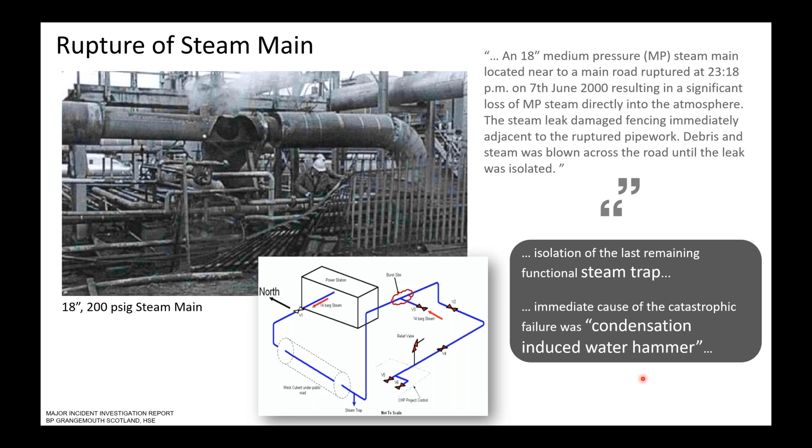So the steam trap, as many of you should already know, is a self-actuating valve that automatically drains condensate from steam piping or steam equipment. They are found at regular intervals along steam mains, or on heat exchangers, steam tracing lines, or steam turbines. They serve a critical function in steam systems by acting as a kind of gate to allow condensate to be removed from the steam space without letting the steam escape.

When there is a functional failure of a steam trap, there are two possible events. It can leak and start passing steam internally, creating energy loss and other problems downstream, or it can fail to fully discharge condensate, causing condensate to back up upstream of the steam trap, which is what happened for the steam trap that was isolated in the previous slide.

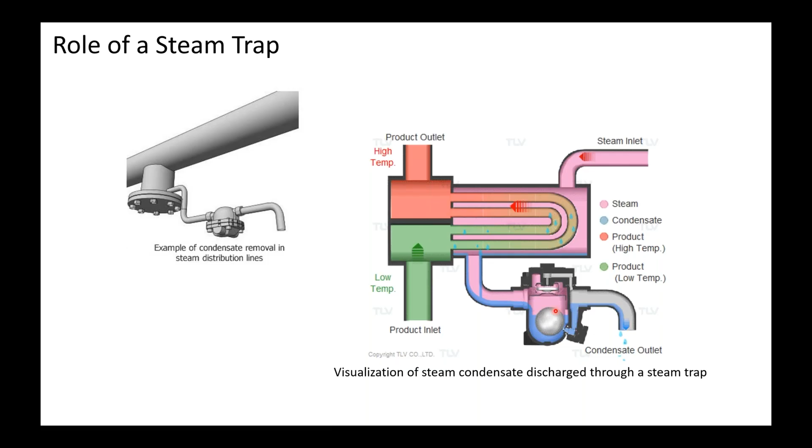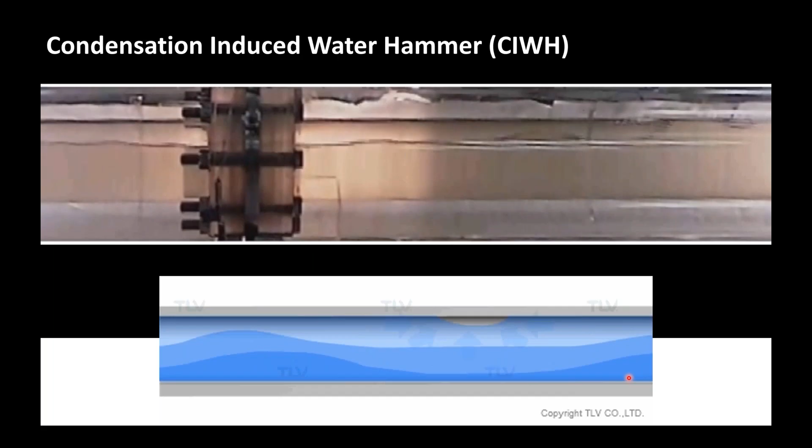So when water hammer happens, we can actually look at the mechanism of what happens inside the piping. This is a video that was taken by TLV when we generated water hammer. You can see that when condensate starts to back up into the steam space, the flow of steam can create waves, and that wave creates an enclosed steam space. When the steam space collapses, the impact causes a massive pressure spike. That's what we actually hear as water hammer.

This is another experiment that TLV conducted back in 2019. Here we used a 4-inch schedule 40 steel pipe, and we wanted to measure the pressure spikes generated by water hammer. We installed some pressure transmitters along the piping, and the system pressure was maintained at around 2 bar, 29 psi. We controlled the flow of steam as well as the flow of condensate through this piping, and then basically just sat down and waited for water hammer to start.

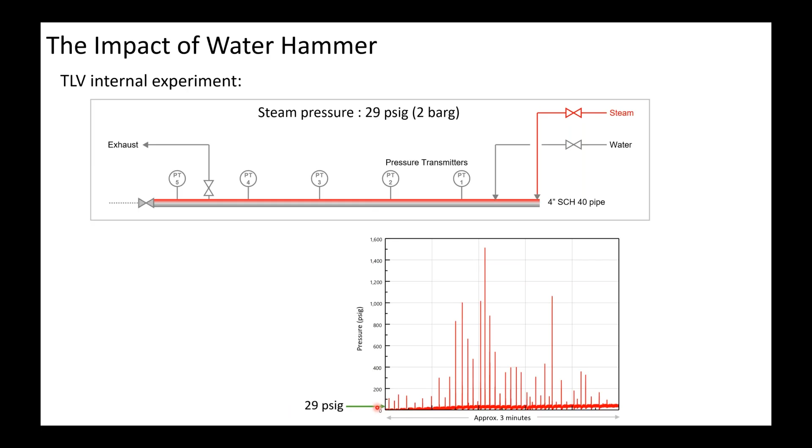This graph shows the pressure trend measured at one of the pressure sensors over a period of about 3 minutes. Like I said, the operating pressure was about 29 psi, and you can see that the peak pressure measured during the water hammer events exceeded 1,500 psi, more than 100 bar gauge. The only reason we didn't measure anything higher was because the pressure transmitters we were using were only rated for up to 100 bar. So this was more than 50 times higher than the system pressure—that was the pressure created by water hammer.

As you can imagine, after we saw these results, what we did was we stood up and moved our chairs further away from the piping before we continued the experiment.

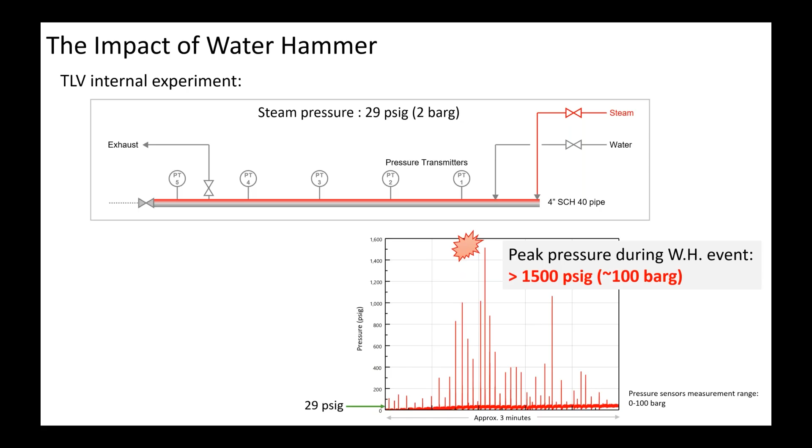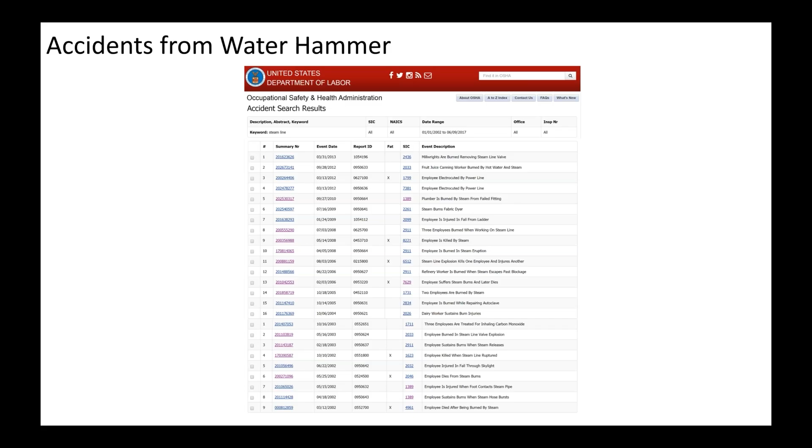Water hammer in steam piping and steam equipment has been known to cause very severe accidents and even fatalities. Looking through the accident records from the US Occupational Safety and Health Administration, we can find events that appear to describe water hammer and events that actually resulted in very serious injuries.

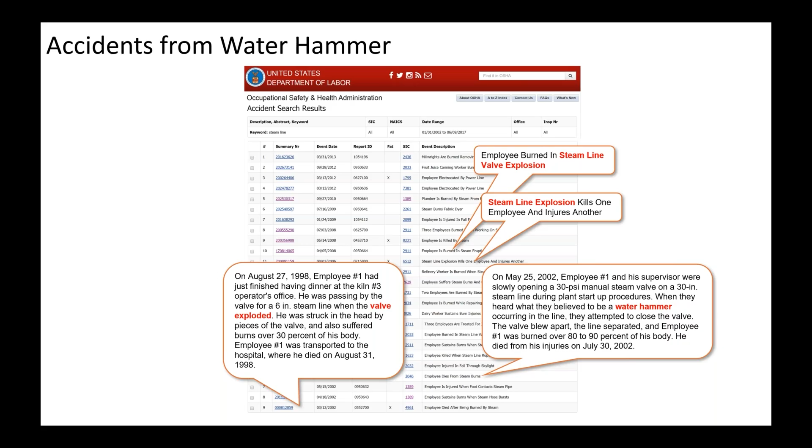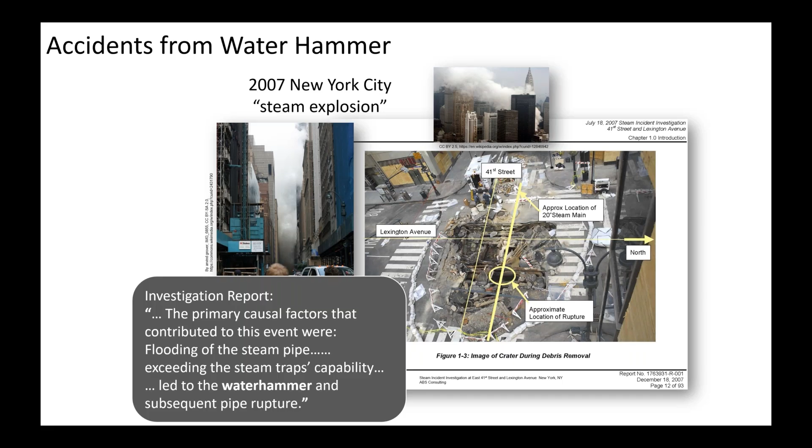Unfortunately, we do not really have the time today to dive any deeper into this topic of water hammer. But I strongly suggest any of you out there who have water hammer issues, you experience problems in your plants with water hammer, yes, reach out to us, reach out to TLV, and I think that's something that we can help you to resolve.

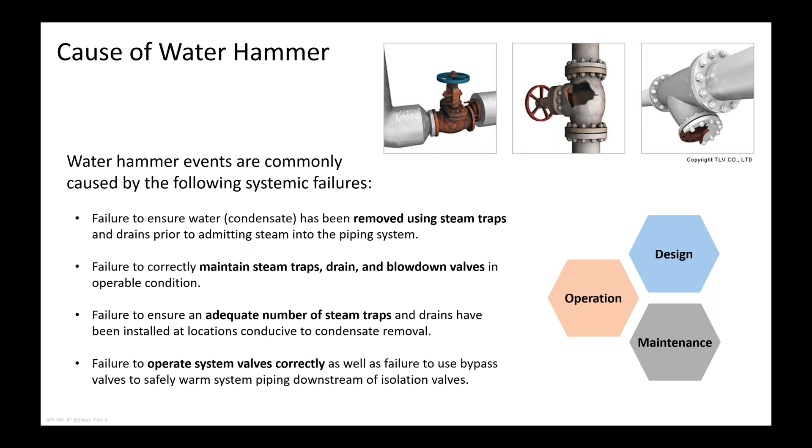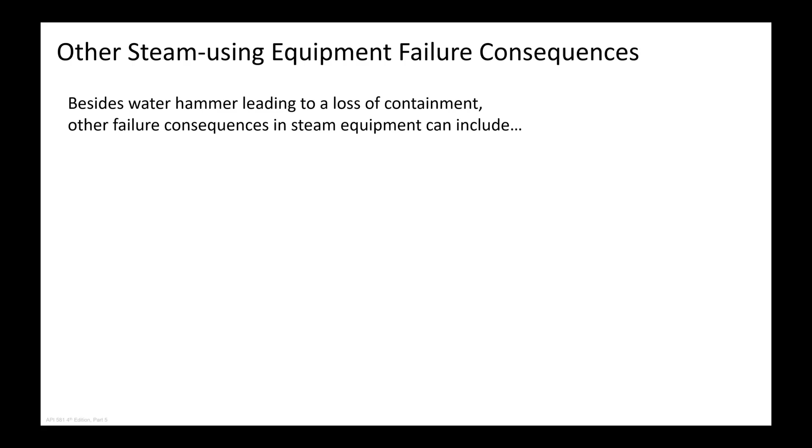I do want to move on to examples of other steam using equipment where we see failure consequences. So besides water hammer, which of course can lead to a loss of containment, we do also see other failure consequences such as steam turbine failures, heat exchanger flooding, and also heating issues.

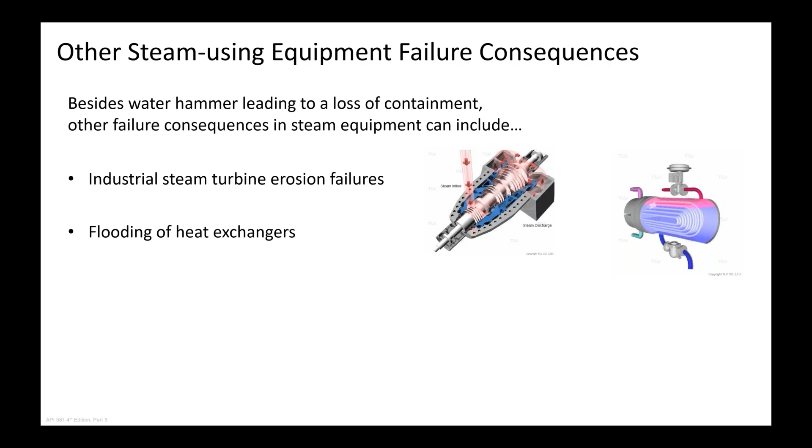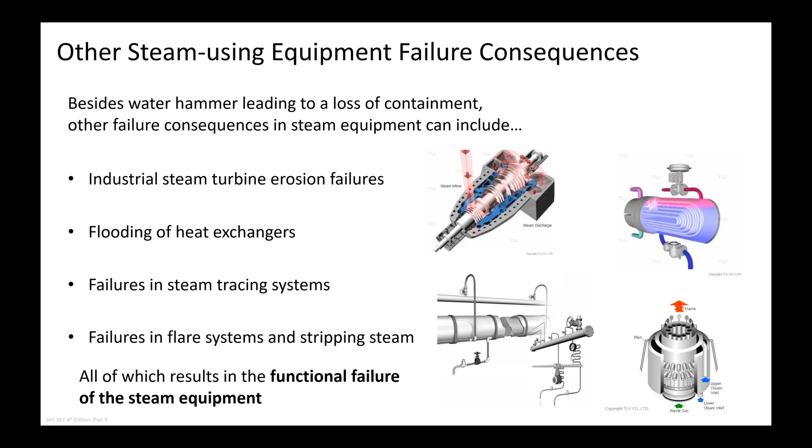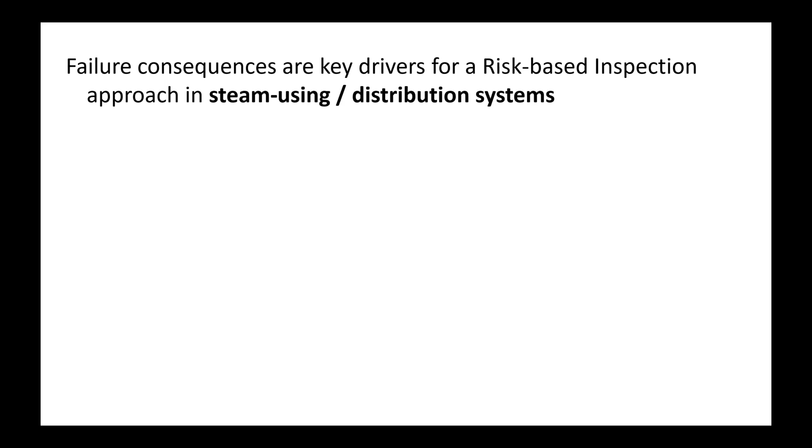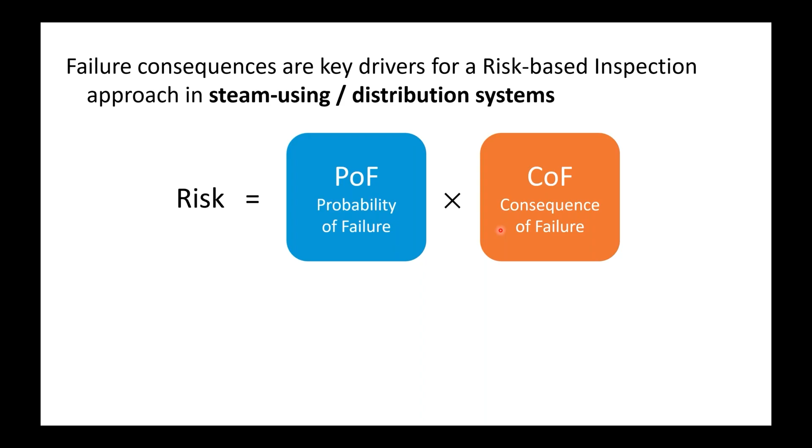So all these failure consequences provide a very strong justification for applying a risk-based approach in steam using equipment or steam distribution systems. So a risk-based approach is when we determine the probability of failure, POF, combined with the consequence of failure, COF. So after we identify the risk, we can then evaluate how to reduce or to manage the risk.

Now in API 581, the recommended practice provides very clear, very detailed methods for RBI, for risk-based inspection. However, actually up until last year, the API 581 standards did not include any methods to evaluate risk that is related to the steam traps or to failure mechanisms such as water hammer.

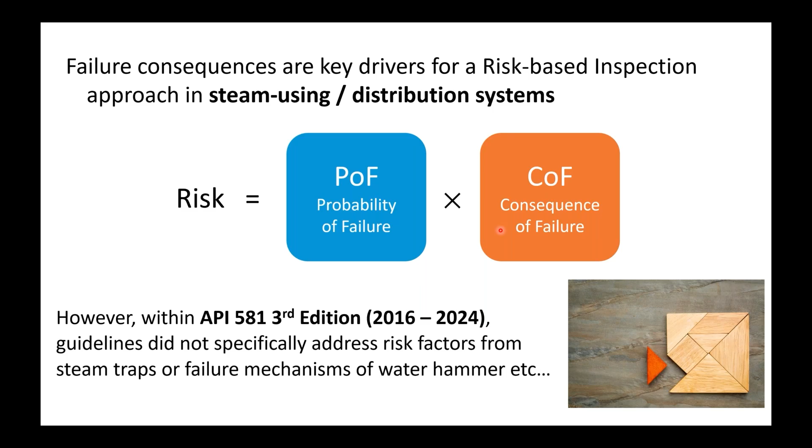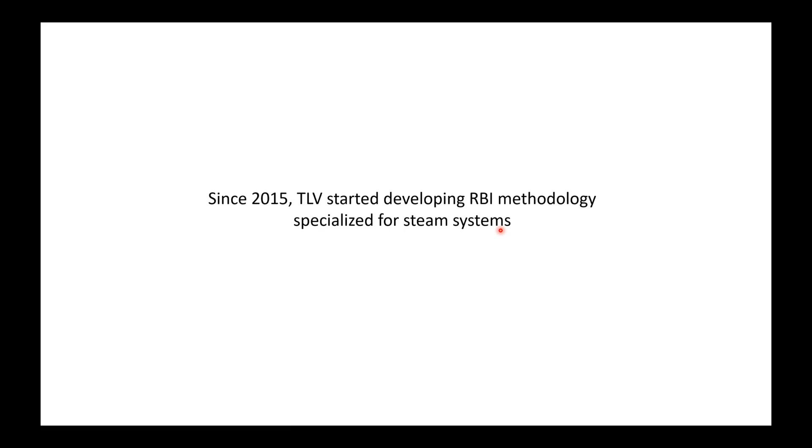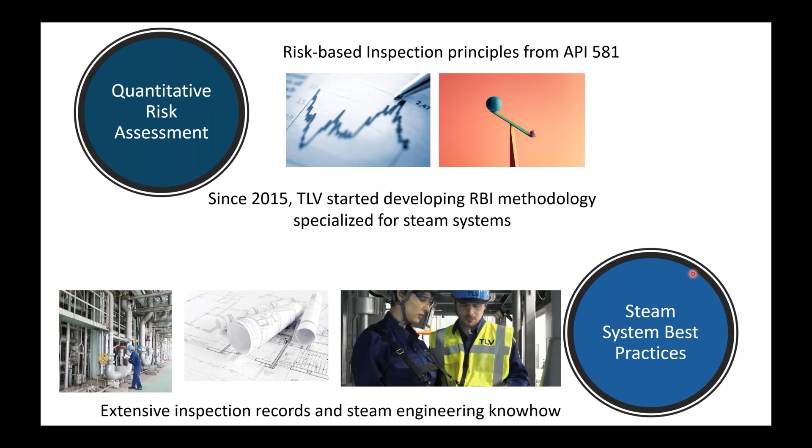And well, exactly 10 years ago, TLV, we started to develop an RBI method specialized for steam systems. So we based it on the principles of quantitative risk assessment as described in API 581. But we also applied our knowledge of steam system best practices and our experiences with steam trap and steam equipment inspections. And we created what we call SSRM, Steam System Risk Mitigation.

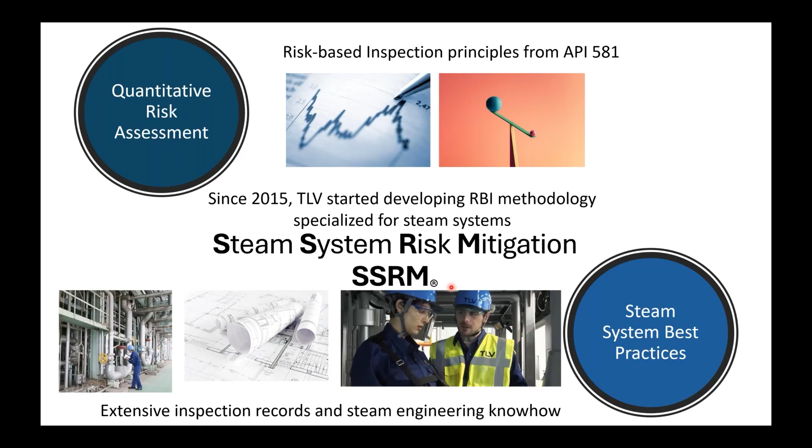And to this day, we have implemented these SSRM methods at 28 plants around the world, mostly in the refining and chemical industries, but also covering some other industries. In total, we have performed risk assessments for more than 400 steam equipment, including steam mains, steam turbines, reboilers, heat exchangers, as well as flare systems and steam tracing.

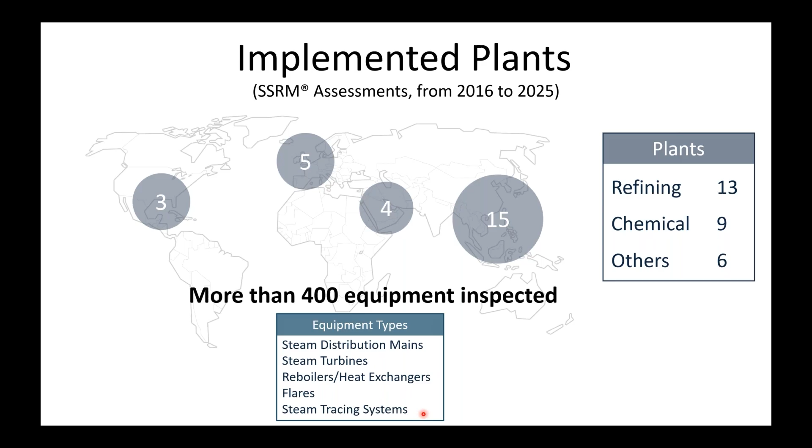And there's also good news because in February of this year, the API 581 guideline was updated to the 4th edition. So this was just very recently released. And there are several improvements and changes from the 3rd edition. One major change was that a new section was added for steam system. So it's now included under Part 5, Special Equipment. And there's a new section here that covers the steam system. And this uses exactly the same methodology of TLV's SSRM.

So it includes water hammer as a damage mechanism like we saw in the earlier examples. And this change highlights the importance of risk mitigation in steam systems and will hopefully help to contribute to increase the reliability of steam systems in the industry.

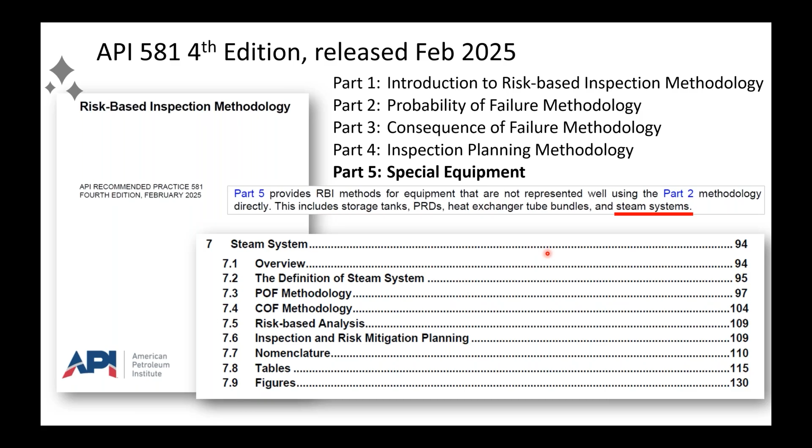So next, I want to go through an overview of what's involved in the risk-based methodology for steam systems. Firstly, we start by calculating the base probability of failure for the steam equipment and its associated steam traps. Here we are using the 2-parameter Weibull distribution. The parameters may be from actual failure data or using the references given in the API 581 document.

In the case of steam traps, this base POF is then adjusted using probability factors to account for the actual site conditions. So that will arrive at the final steam trap POF. And of course, if there are multiple steam traps involved, their relative configuration is used to calculate the line POF, which we can then combine with the adjusted steam equipment probability of failure to calculate what is the final steam application probability of failure.

And then on the other side of the equation, we can calculate the consequence of failure by considering factors such as production downtime, component damage, or injury costs. And then finally, we arrive at a risk value that can be expressed on the risk matrix. So these results can then be used for risk mitigation planning or for cost risk optimization.

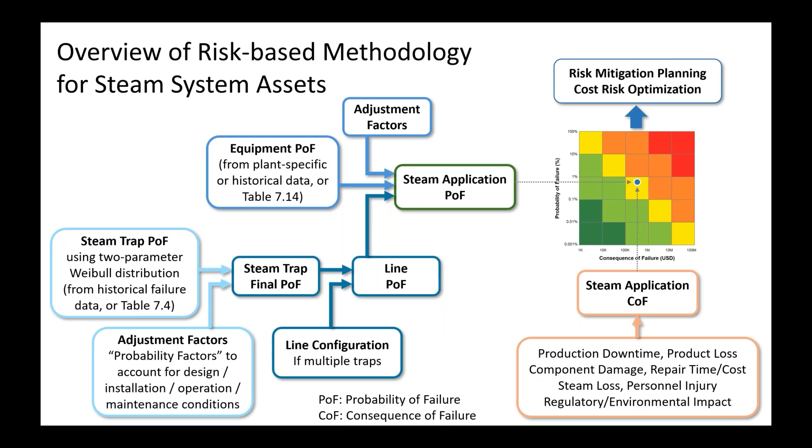Some important notes about this approach, first of which is the risk analysis is performed for the steam-using equipment or for the steam main together with their associated steam traps. So what this means is that we get a risk result of probability of failure and consequence of failure for each steam equipment. Essentially, we get one dot on the risk matrix. So if we perform an assessment for 10 heat exchangers, for example, we can then plot 10 dots on the same matrix.

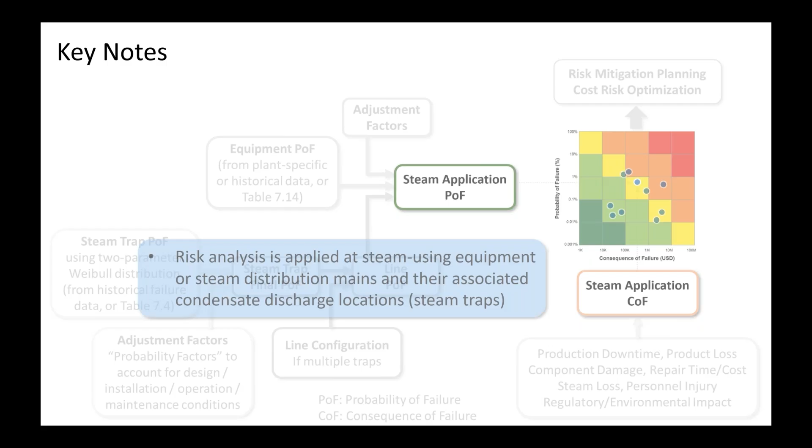So you can also imagine this allows for an objective comparison of the risk from different equipment in the plants and where priority should be given. Another key note is that for the steam trap probability of failure, of course, there are reference parameters that are provided in API 581, but it is still recommended to use more accurate data if available.

In the SSRM risk assessments that TLV perform, we have a very large database of more than 300,000 steam traps inspected over the course of 15 years. So this allows us to derive more accurate failure probabilities of the steam traps.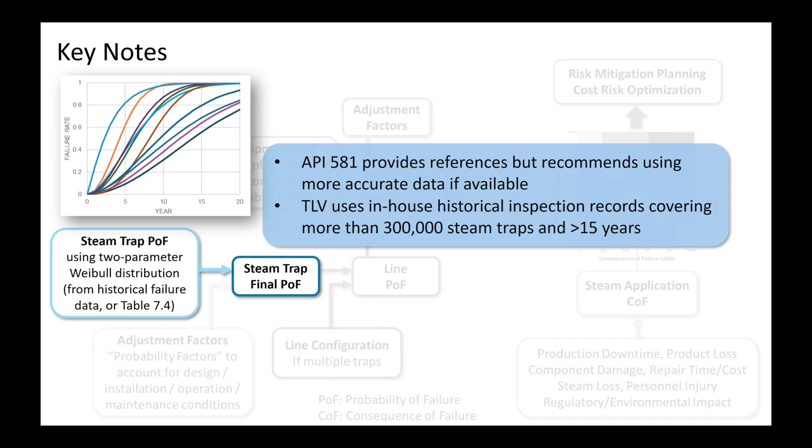And then very similarly, in the case of the steam equipment probability of failure, again, there are reference values that are provided in the API documents, or plant-specific data can be used. In the absence of plant-specific data, TLV will use external sources such as the OREDA handbook or industrial failure data to estimate the base equipment POF.

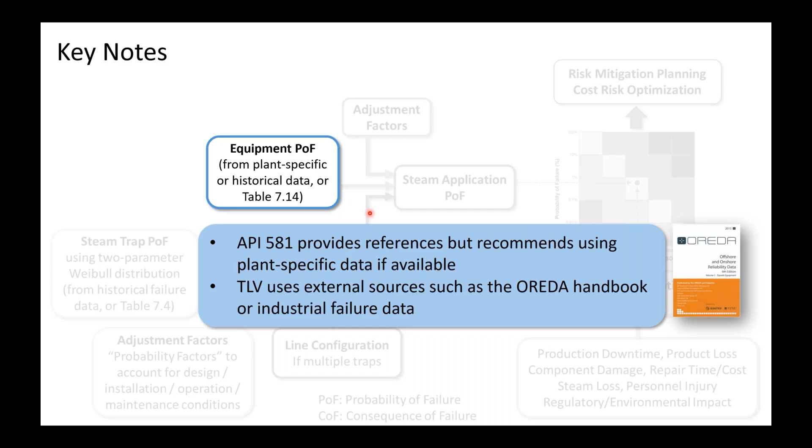And then finally, one more note is that the calculated probability of failure is a function of time. So the increase in risk over time can be simulated. So for example, what you see here, we can actually simulate over the following years what is the increase in risk. That means that for the equipment that were evaluated to be low risk currently, it is possible to project into future years when that risk will exceed the allowable threshold. And that will allow for more proactive maintenance and inspection planning.

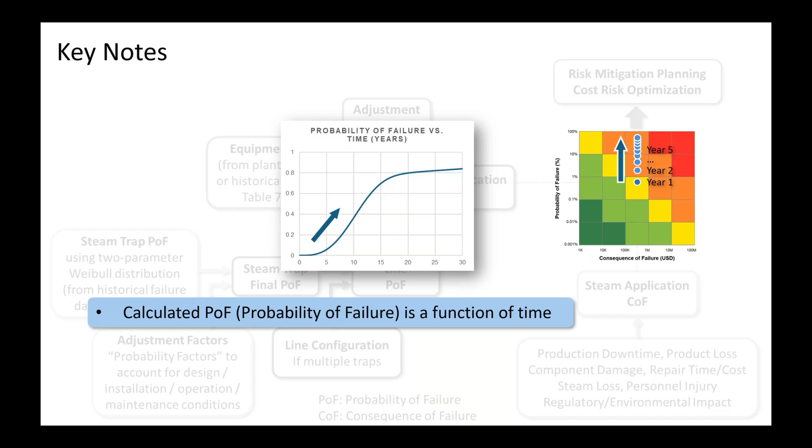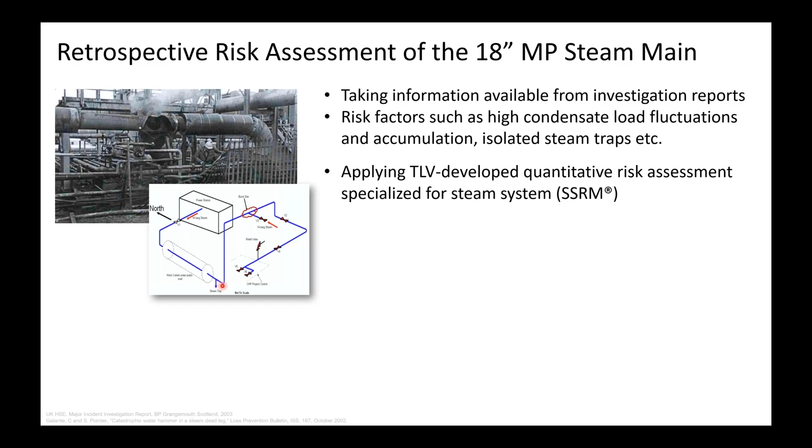And then, coming back to that first incident I showed of the 18-inch steam main rupture in the petrochemical plant. Actually, from the investigation reports, we can identify roughly what is the system configuration as well as the conditions before the incident. And then making some assumptions, we can perform a quantitative risk assessment for this section of the steam piping to estimate what was the risk of failure due to water hammer.

If we plot the results on the risk matrix, we can see that at a point in time, 6 months before the water hammer incident, the risk would have been evaluated to have been extremely high. And then using the same methodology, we can also simulate the reduction in risk if corrective action was taken. In this case, the corrective action was simply to replace 2 of the steam traps that were located at very critical points in the piping.

And we can also express this reduction in risk in financial terms, which was equivalent to more than $6 million when considered over a 5-year period. So this demonstrates that a risk-based approach in this example would have been very effective and could have even helped to avoid this kind of incident from happening.

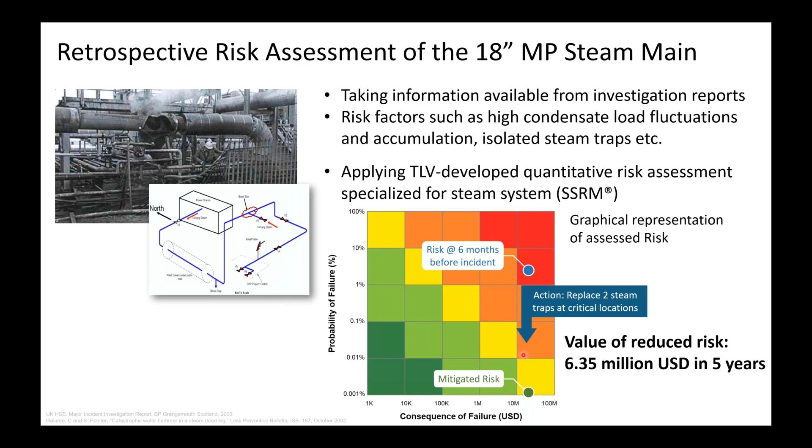I'm going to hand over now to Justin to go through some more detailed case studies of how we applied this risk-based methodology for steam systems.

So this next half, what I'm going to do is go through some case studies and provide some guidance on how SSRM can be utilized in your plant. So we have 3 case studies to review. We'll have a flare and its associated steam supply header, and we'll discuss some of the unique challenges that can make flares prone to high risk of failure. We'll talk about a reboiler. In this particular example, we'll look at a reboiler that utilized an outlet level drainage device and had a history of severe water hammer.

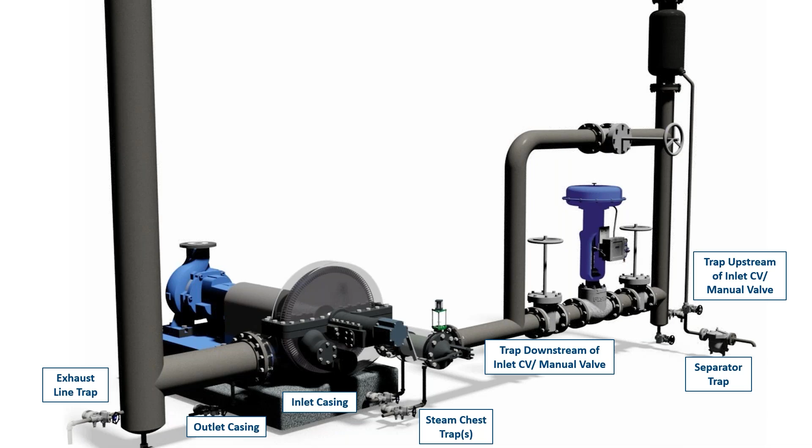And finally, we'll talk about a small single-stage turbine. Actually, let's start with this turbine. So if you include the steam line piping immediately upstream and downstream of the turbine, you'll find there are several critical drainage locations. It's important to note that, of course, not every turbine is designed exactly the same way, so it's important to identify the low points where condensate can collect for the turbines in your plant.

But for smaller single-stage turbines, especially with a steam inlet control valve and exhausting to a low-pressure steam header, like I'm showing here, these are the typical drainage points. So starting from right to left, first we have a separator drain trap, followed by the inlet and outlet drains at the steam supply control valve. Next we have a trap, sometimes multiple traps, at the steam chest or trip and throttle, as well as traps at the inlet and outlet turbine casing. And finally, we have a trap at the exhaust pipeline.

So first, I'd like to point out that with this turbine, it actually did not include a moisture separator. So it's already at risk for blade erosion and potentially performance deficiencies if the steam supply has a low quality, meaning that there's condensate entrainment or the steam is wet. And note that this is totally independent of any of the steam traps that we're talking about related to the turbine itself or the piping.

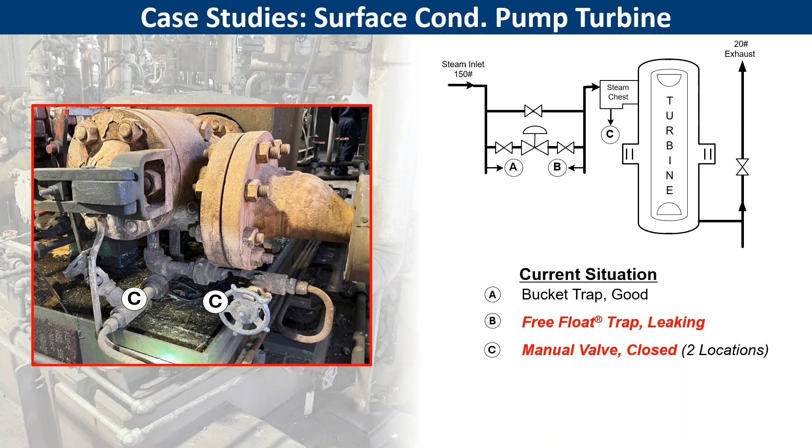So first, two traps are on either side of the steam inlet control valve. One was good, the other one was leaking. So not too bad so far. Next, we're going to focus on the trip and throttle. So you'll see in the image, there are actually two distinct drain points on the trip and throttle. Each of these are going to serve to protect the valve and the inside parts of that turbine. And if you look close enough, you'll see that the valves that would drain condensate are actually closed. So it is preventing the passage of condensate from either section of this trip and throttle.

Similarly, there's a closed valve on the inlet side of the casing. Fortunately, the outlet casing drain utilized a free float trap, which was in good condition. Finally, if we move to the exhaust side piping, you'll see yet another valve that's closed. So again, preventing passage of condensate from the exhaust piping. So of these seven drainage locations on this turbine, including the associated inlet and outlet piping, there are really only three locations, including the leaking trap at location B, which are actively draining condensate.

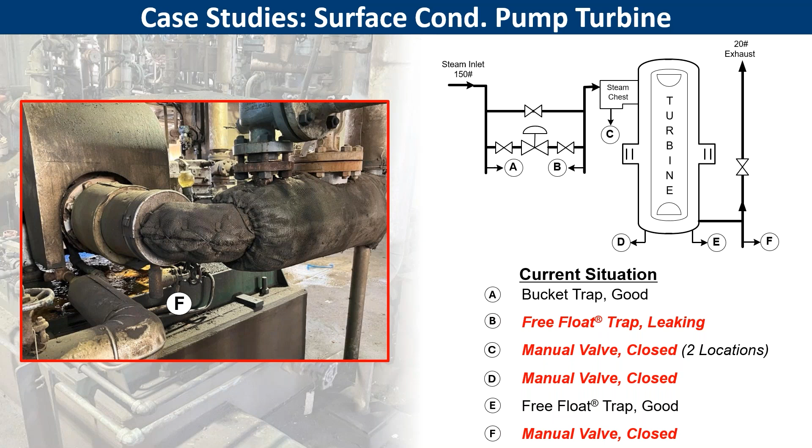So for some people, you might be thinking, well, what's the big deal? You might be thinking that, hey, Justin, when a turbine is operating, there are high velocities, and that should help prevent accumulation of condensate. Sure, that might be correct, but this particular turbine actually happened to be on hot standby, meaning that it wasn't actually in use. It was paired with an electric motor that was in operation. So steam was still supplied to the turbine to keep it hot, but steam wasn't actively flowing through the turbine. So at this moment in time, the turbine was more or less a dead leg, where steam will condense and water will eventually fill the equipment until it reaches a location where condensate can be drained out. But hopefully it's clear that the lack of active drainage in this turbine and associated piping is a problem, especially while it's on hot standby.

Now, to complicate things a bit more, this turbine utilized an unsupervised and automatic startup function. This can be extremely beneficial for plants trying to manage their steam and electricity balance, but when a piece of equipment like this, which requires a dry steam space for a smooth startup and operation, is instead probably full of condensate, then an automatic and unsupervised startup of this turbine is likely going to result in a turbine trip and potentially cause a lot of damage to this turbine. So based on our evaluation, we assessed the risk value as shown here by that blue dot in the middle of our risk matrix.

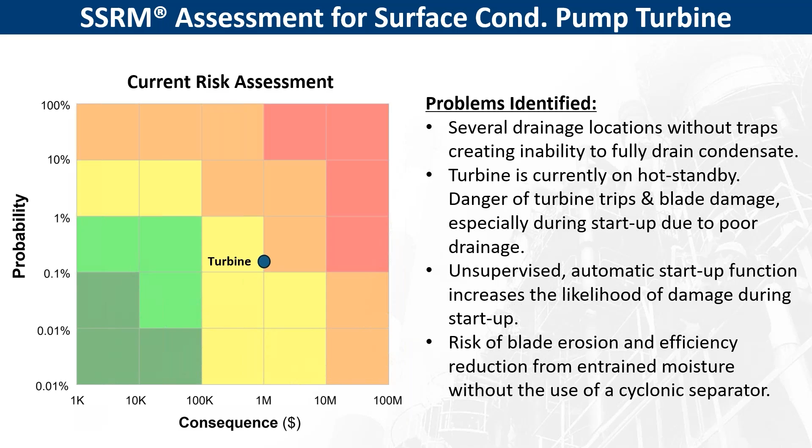In order to mitigate the risk we identified, there's a couple very standard but critical actions to perform. So first, we want to install steam traps at all the locations with no current drainage. So that's going to be all the locations that we identified with a closed valve. And this is, of course, going to help ensure that condensate is being actively removed from the low points in the piping and in the equipment. Otherwise, we might get into a situation where we have a turbine trip or some other type of damage.

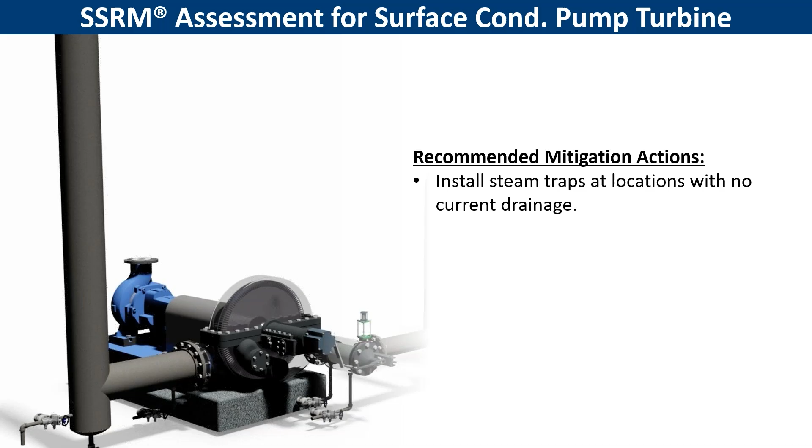Next, we're going to want to install a high efficiency moisture separator and drain trap upstream of the control valve. Now, depending on the design of the separator, this could help to remove up to 98% of entrained moisture and may even be able to help remove high-speed condensate slugs that could otherwise cause significant equipment damage.

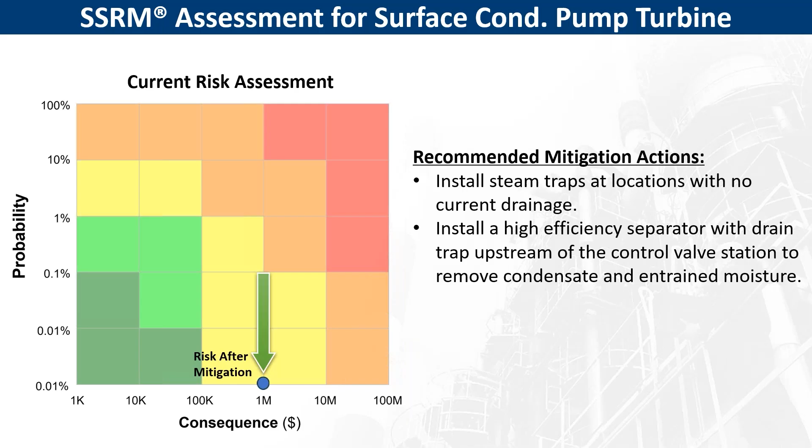So those 2 mitigation actions are going to help significantly lower the risk, as you can see there, to the tune of about $70,000 US dollars in a 5-year period. This risk mitigation merit might seem small to you, or it might seem very high. It's important to keep in mind that both the consequence of failure and the adjustment of the probability of failure is what gives us the mitigation merit value. In this example, the consequence of failure is about $1 million US dollars, whereas a larger, more critical turbine may have a much higher consequence of failure and therefore a much larger 5-year risk mitigation merit.

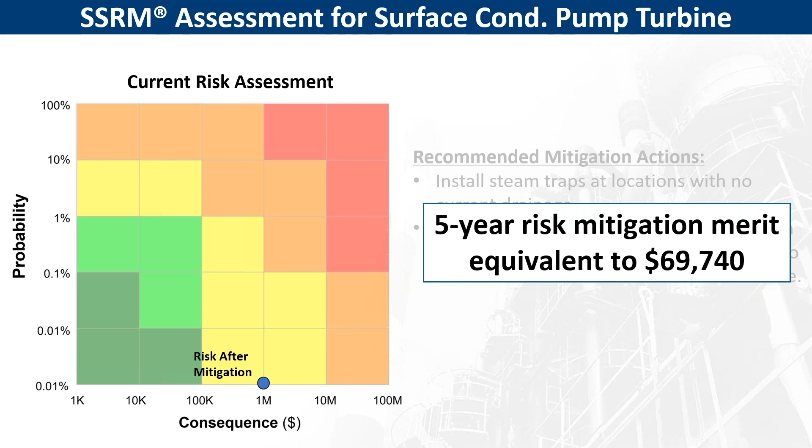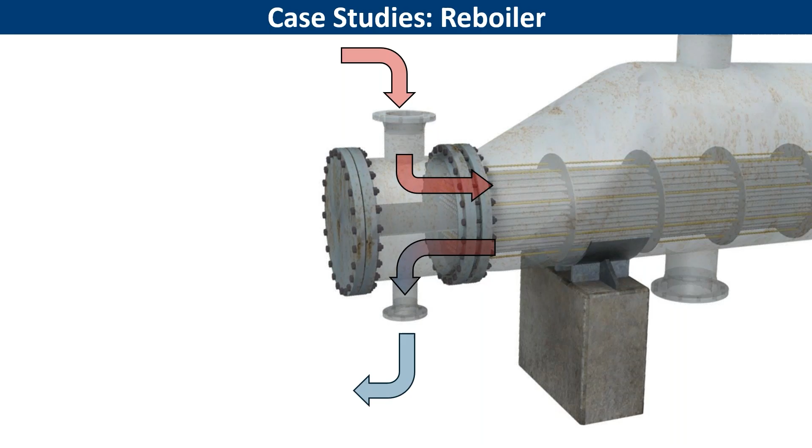All right, so let's move on to the reboiler. For those of you familiar with reboilers or other types of shell and tube process heaters, you'll know to expect a differential pressure across the steam space, meaning that as steam passes through the tubes, steam pressure is lost, often such that the outlet pressure is 2% to 15% lower than the inlet pressure. So if we're using, let's say, 100 PSI, then potentially the pressure on the outlet side could be 85 PSI.

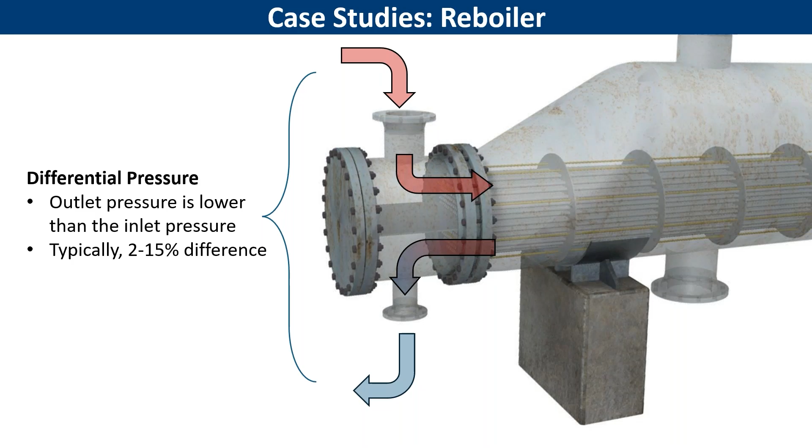Many reboilers utilize one form or another of outlet level drainage. The one you see here incorporates a level pot and requires an equalization line, which helps displace vapor as the liquid level inside the level pot rises and falls. However, we often find that equalization line is routed to the steam inlet piping like you see here. Combined with a large pressure drop through the steam space, we're going to encounter a scenario where condensate has to drain from the reboiler steam space against a higher pressure than originally intended.

And so when this happens, condensate is often unable to drain from the steam space fast enough, sometimes if at all. And so that's going to eventually lead to an accumulation of condensate inside the steam space, typically resulting in poor process control and water hammer.

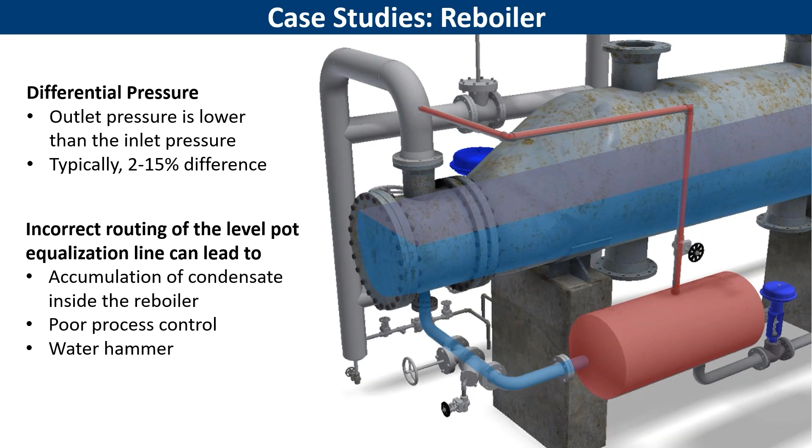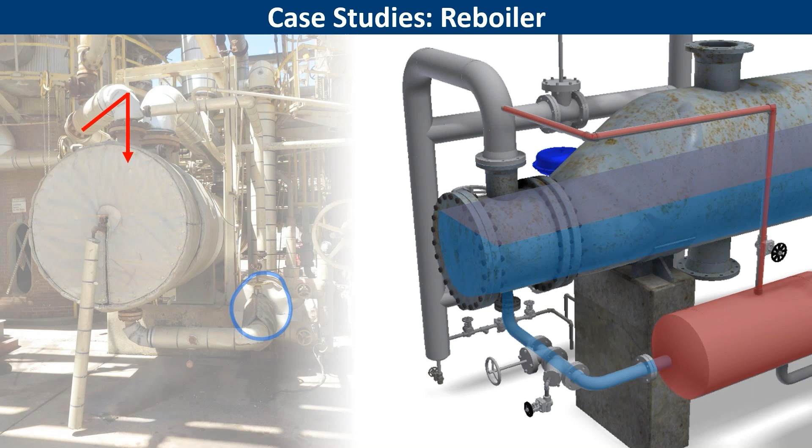With our real life example here, we can see the exact same thing occurring. We have the steam supply and the condensate discharging to an outlet level pot. You can see how the equalization line is connected to the steam supply. On site, we could tell there were problems due to the significant temperature difference measured at the equalization line compared to the temperature at the condensate discharge. At the top, 443 degrees Fahrenheit at the equalization line and about 330 degrees Fahrenheit at the condensate discharge—a little over 100 degrees Fahrenheit difference. When we see a dramatic temperature difference like this, it's usually a clear sign of condensate accumulation inside that reboiler or steam space.

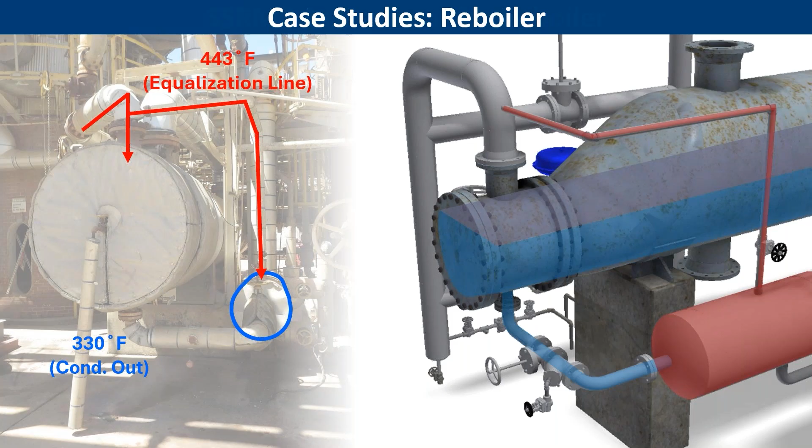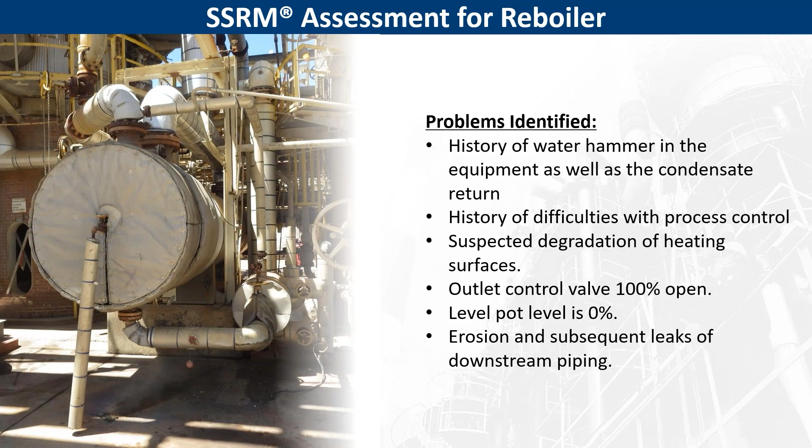After speaking with operators and their operations team, we found there's also a history of water hammer. We suspected there would be water hammer and found out that there really was. They also expressed a history of difficult process control, and even suspected a degradation of the heating surfaces. While on site, we also found that the outlet control valve was 100% open with 0 level in the level pot. On top of that, quite a bit of erosion and corrosion and condensate leaks in the condensate recovery piping.

So what the operations team decided to do to mitigate their problems is discharge all the condensate to the sewer. The interesting thing about this decision is that in doing so, they were able to help mitigate most of the water hammer, but it didn't actually solve any of the issues related to poor process control, since the short circuiting of the high pressure steam, bypassing the tubes inside the reboiler, was still able to easily make its way to the outlet. So it still created a very difficult pathway for condensate to be discharged through that reboiler.

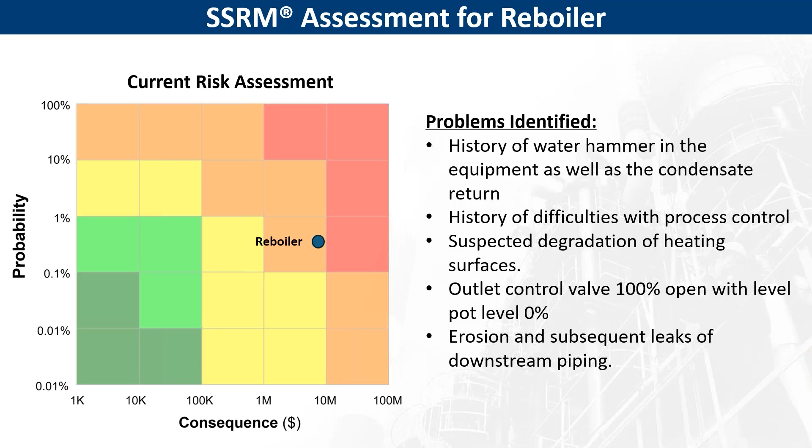Considering all these problems, we assessed the current risk value. It's represented here by that blue dot. It might be obvious, but the recommended mitigation action was to reroute the equalization line to a lower pressure steam space on the reboiler. Fortunately, in this case, they were able to utilize an existing tapping on the channel head to reroute the equalization line to that lower pressure steam space. Now, this isn't always the case—sometimes we find there is a tapping, sometimes there's not, and sometimes if there is a tapping, it might be connected to other piping and utilized for some other purpose. But this was at least one pathway we could use to fulfill this mitigation action.

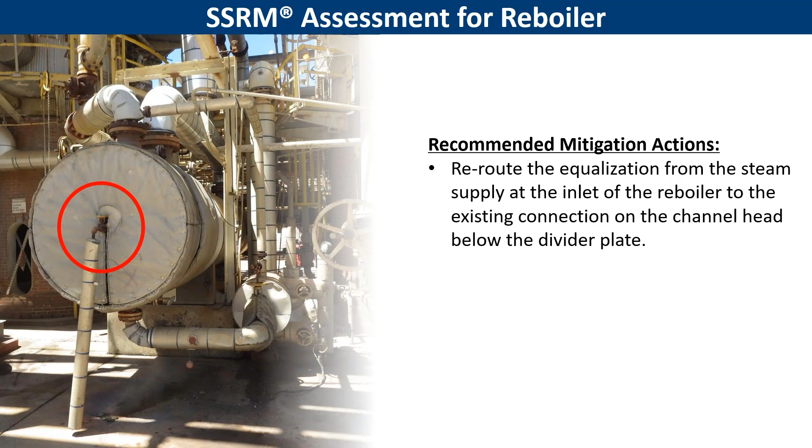In doing so, condensate is able to freely drain from the level pot and from the reboiler itself, helping to mitigate the accumulation of condensate and help the reboiler operate as intended. On top of that, plant personnel really should evaluate the condition of the heating surface for any fouling or corrosion, as well as check the condition of the outlet level control mechanisms to make sure those are working properly, and perform any repairs necessary to restore the originally intended operation of the reboiler.

Finally, closing that outlet blowdown valve is going to help allow the plant to recover that lost live steam and condensate.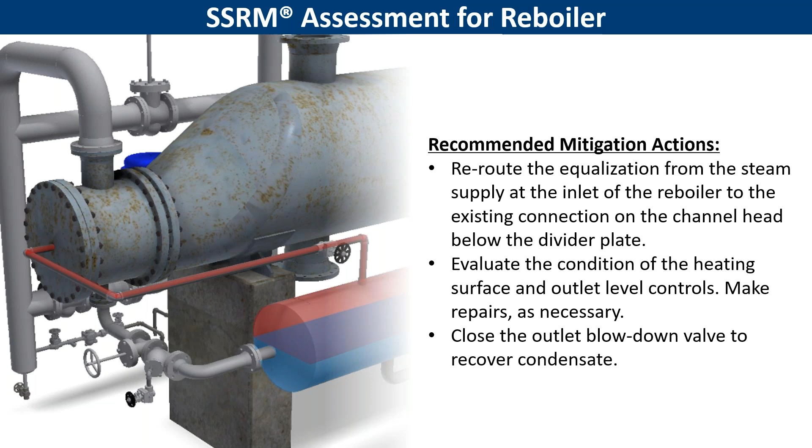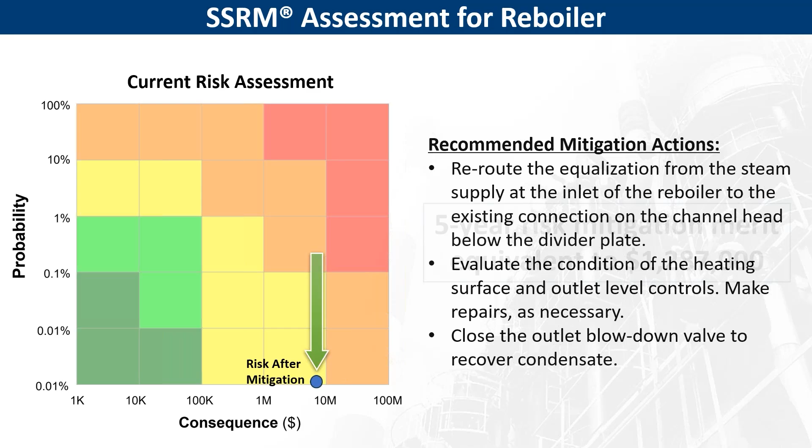Performing all these mitigation actions is going to lower our risk assessment, helping to provide a 5-year risk mitigation merit of nearly $1.3 million US.

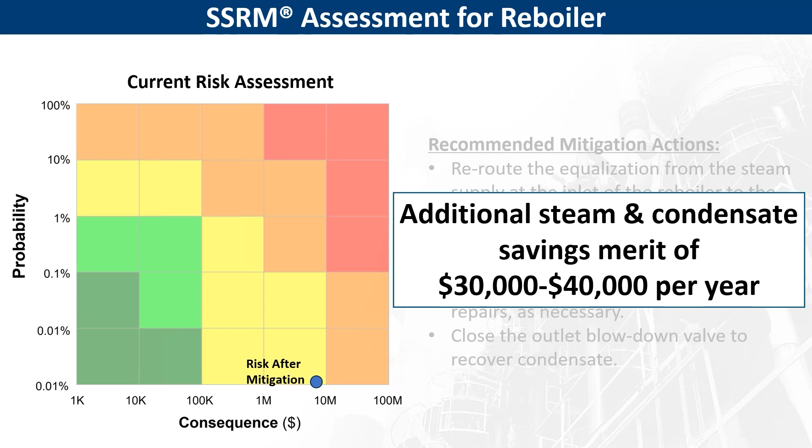As a bonus, closing that outlet blowdown valve, now helping prevent the loss of steam and condensate to the atmosphere, will actually earn an additional merit of about $30,000 to $40,000 annually. So, big win here.

Seeing how the updated guidance of API 581 and maybe SSRM can be applied to steam systems, I really hope you're beginning to ask yourself: how can I begin applying risk-based inspection to my steam assets?

My answer is TLV is more than happy to help, and we'd like to propose utilizing TLV's service of SSRM, or Steam System Risk Mitigation.

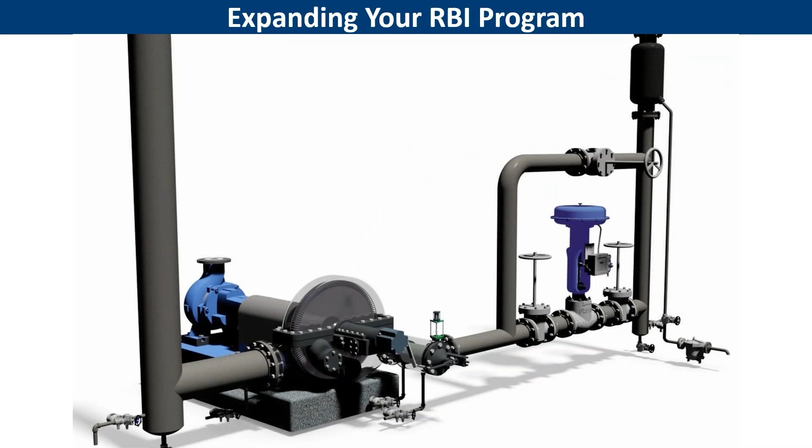We've covered examples of applying SSRM to a steam turbine, looked at a reboiler, and looked at a flare.

But beyond that, we can also apply SSRM to vacuum steam systems, which would include steam injectors, as well as the inter and after condensers of vacuum systems.

We can apply it to tracing systems, whether it's tube tracing, process pipelines like you see here, or jacketed piping, like what's often seen in sulfur recovery units, or instrumentation tracing, which sometimes can be extremely critical to the operation of a manufacturing plant.

And we can apply it to any and all steam distribution headers and condensate recovery headers.

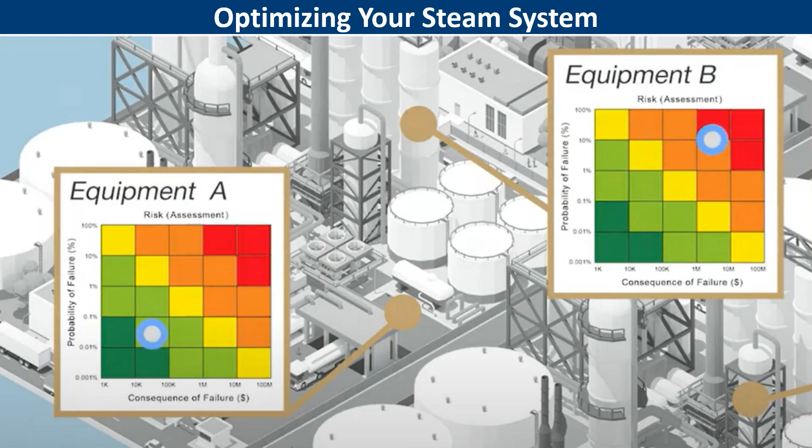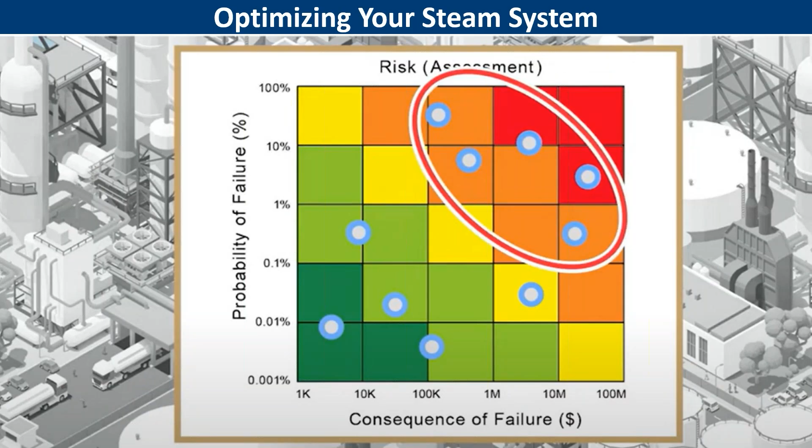Of course, it's one thing to perform a risk assessment of individual equipment, but combining this analysis of an entire area or an entire plant on a single matrix can really help us understand the highest risk areas. It's going to help prioritize where to focus your efforts in reducing that risk.

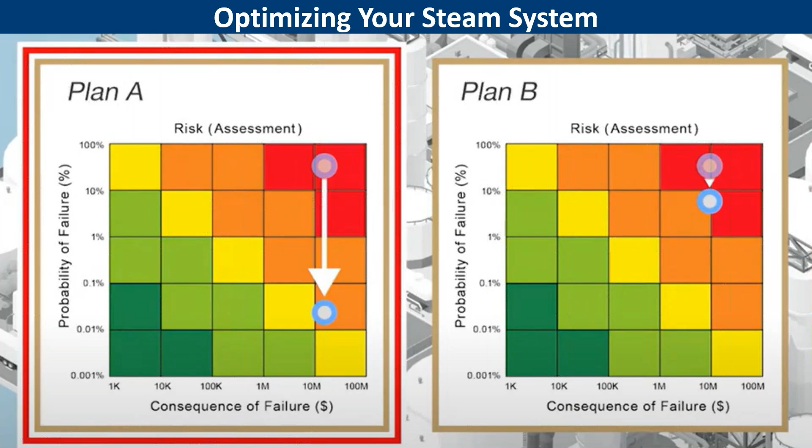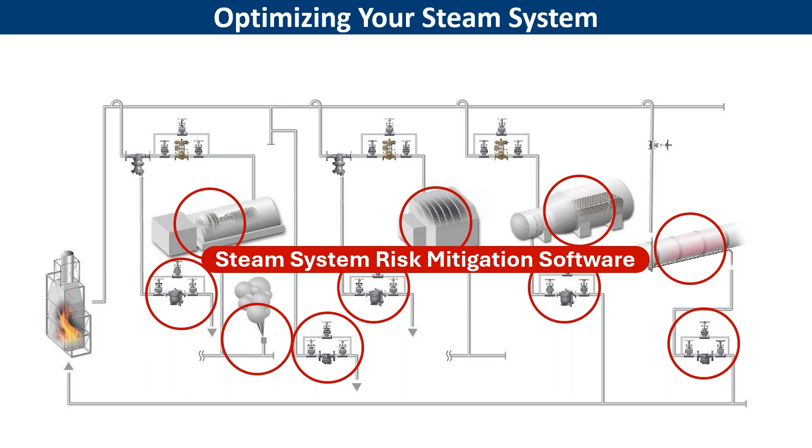TLV's larger objective and goal is we really want to help our customers optimize their steam systems. So performing risk-based inspections on steam systems, like with TLV's SSRM or Steam System Risk Mitigation software, is certainly going to help highlight and quantify specific pains within your plants, and it can help resolve the best path for mitigating those pains. But we strongly encourage pairing this with a robust condensate discharge location management program, which will help maintain a minimal or ideal risk level at your plant.

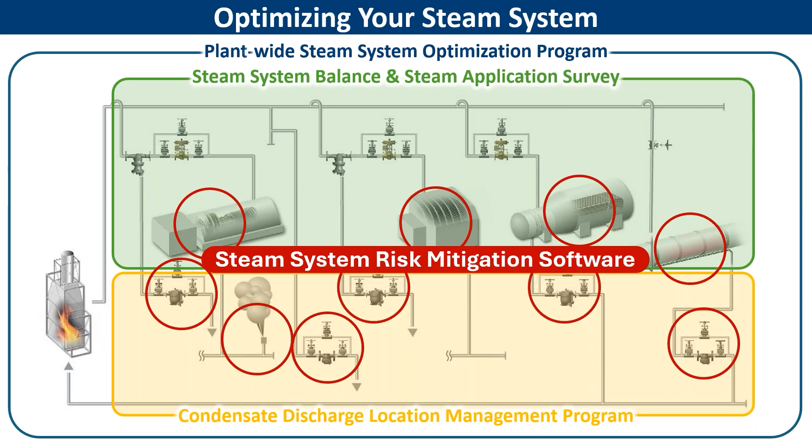And then further, if we pair that with the steam balance or steam application survey to focus on things like energy management or condensate recovery, then putting this all together is the absolute best approach to creating a plant-wide steam system optimization program and fully optimizing your steam system.